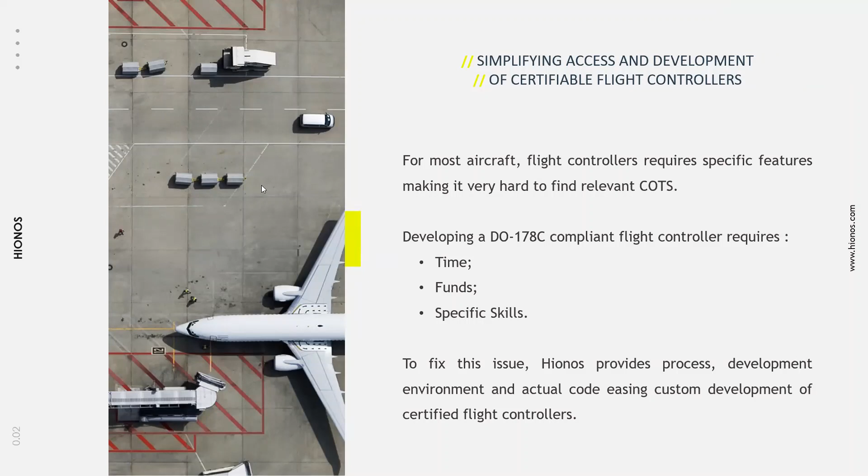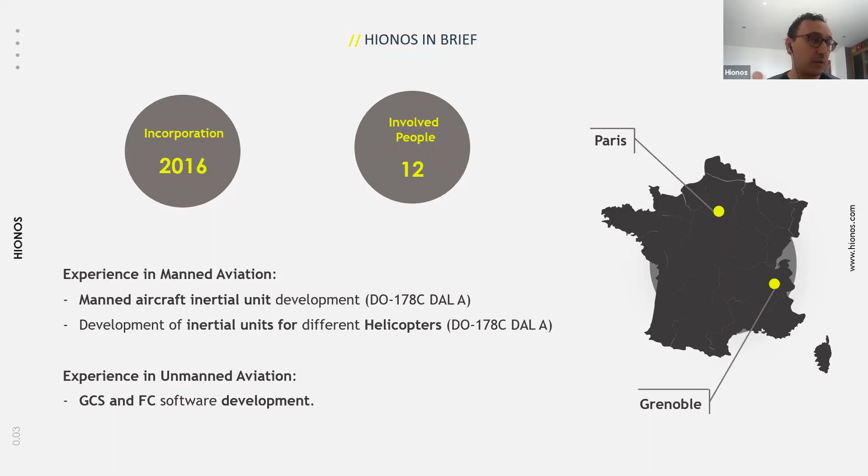So Hionos was created in 2016, and today there are 12 people involved in the company in Paris and in Grenoble. The Hionos team has mainly an embedded software background and a lot of experience in the development of certified software solutions in avionics. Big experience in the development of inertial units for avionics and for helicopters, in compliance with DO-178C up to DAL A, and also experience in the development of software for unmanned aviation, especially ground control software and flight control software.

Hionos scope starts when the need for DO-178C for the whole or a part of the software is clearly identified.

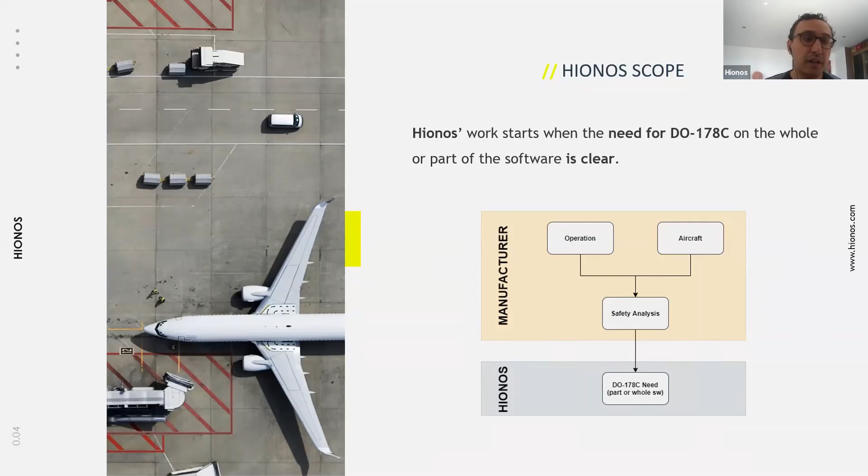So, as I said, Hionos scope starts when the manufacturer's scope of the need of DO-178C is well identified, and it will be identified when some activities are realized, like safety analysis, and this need will also be dependent on the type of operation and the aircraft characteristics. The role of Hionos is to work closely with the manufacturer to apply those needs in the software part by implementing the appropriate software compliant to DO-178C for the appropriate level of criticality.

In the context of its scope, Hionos provides 3 different products. We provide a process which is compliant to DO-178C called Supvareno with the appropriate certification plans. We provide also Pulsar Factory, which is a development environment which includes all the appropriate tools to develop DO-178C compliant software, also in compliance with Supvareno, and we provide also off-the-shelf autopilot software for drones. And in Pulsar Factory, we can reuse a set of components from Pulsar to obtain a new tailor-made autopilot.

And we will talk in more detail on those solutions in the next presentation. But before, I turn the floor over to Antonio to present Abionica and European regulation, and then I will finish with the presentation of the development lifecycle for certified UAS.

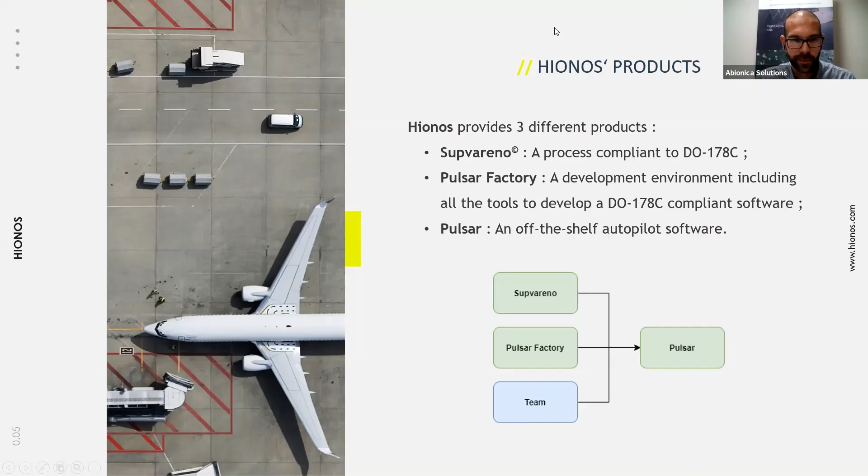I'll introduce myself. I'm Antonio Belmar. I'm founder of Abionica Solutions and Prime Core Systems, and I've been in this industry for almost 15 years. Actually, we started in this industry when there was no application for unmanned aircraft. So we had the aircraft, but we didn't have any application to put it to. And we've been there for a long time working mainly in flight control systems, both the hardware and the software part, and at architectural level. And after all that time, in 2018, I founded Abionica Solutions.

And having all that background, you can see here, developing autopilot guidance systems, guided ammunition, the first certified civil UAVs in Spain and Europe, and also working in smaller and bigger aircraft. The company started working in the development of Targus OPV. It's an optionally piloted vehicle, a twin-engine, 1.2 tons aircraft. And our know-how covers autopilot control laws development and integration, aerospace-grade flight control system design, development and integration, and consultancy and training services.

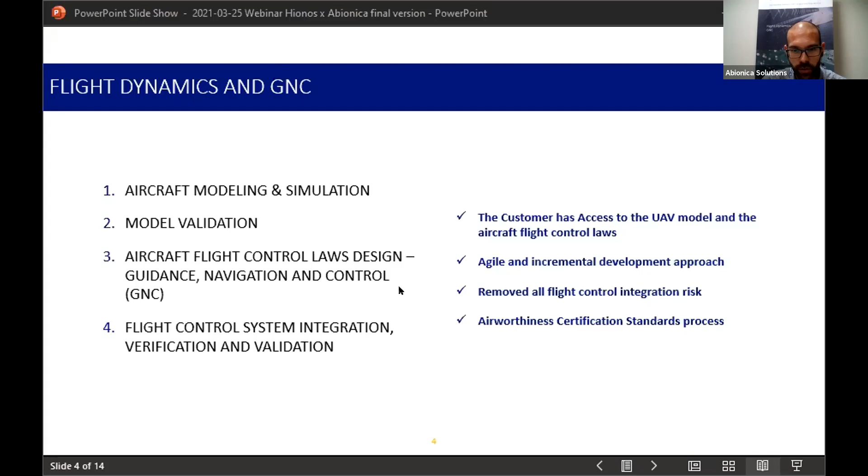I'll tell you a little more about that. So from the flight dynamics and GNC, we cover all the value chain from aircraft modeling and simulation to flight control integration and verification during flight testing, and obviously implementation of not just control laws but also guidance and navigation.

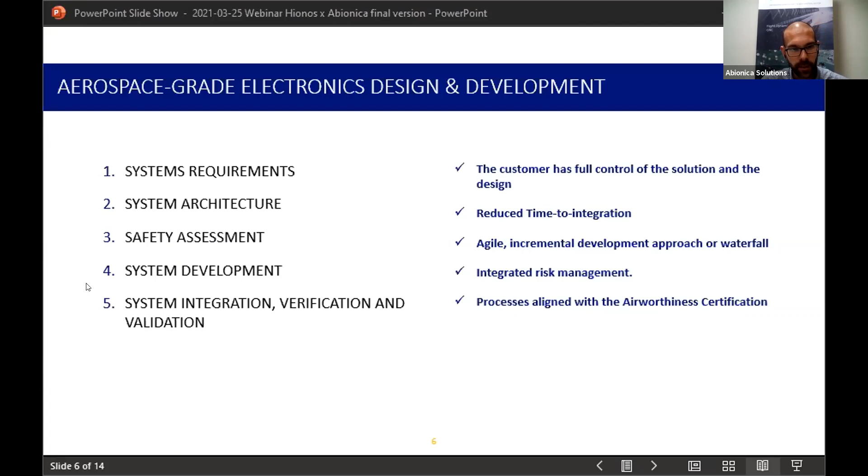From the aerospace-grade electronics design and development, we also cover the whole product life cycle, from system requirements to architecture assessment. We skip this part. Most of the times we outsource, or the customer outsources the development of the hardware, but we specify for them the hardware and software requirements. But we cover also the supplier management, and we also cover with them the integration, verification, validation activities.

And the consultancy and training services: the most common services we provide are related to conceptual studies, so conceptual phases like trade-off studies, feasibility studies, and other support. Advisory services regarding the market, so how the market for certain products is there, because as we said, we gather a lot of information and experience from the US market in general.

And the training, because most of the manufacturers, and we'll talk about that during the presentation of the UAS certification, most of the manufacturers lack certain processes implemented in their organizations, so we help them embrace those processes. We customize those processes for them, so we help them grow as their product grows, right?

So some initial inputs related to the UAS certification. So what's the certification, first of all? Well, it's a process where it is demonstrated that the aircraft type meets safety requirements. The design organization selects or builds a set of certification specifications, I'd say those are the basis, and agrees with authorities.

It's kind of a negotiation process where the manufacturer says, okay, these are my specifications, and I want to design something based on that. And the authorities say, okay, if you develop something and you demonstrate to me that this is what you have in the end, I will allow you to fly. It's not as simple as that, but more or less that's the short story of it, right?

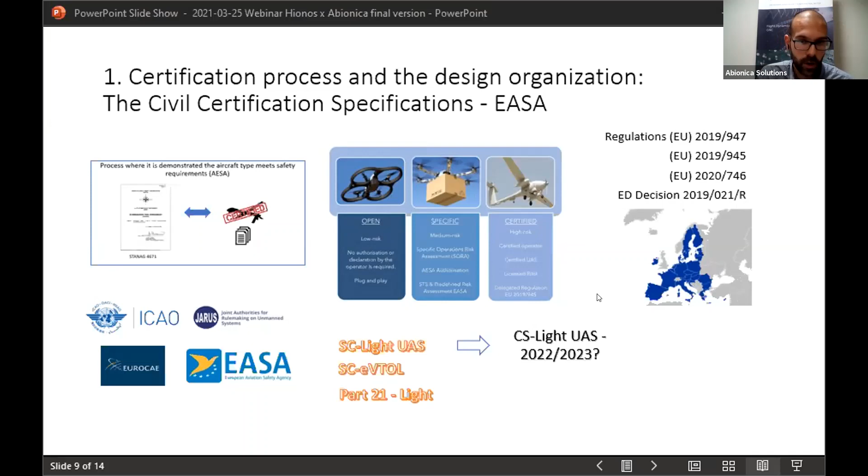These new regulations are already in place in the European Union and some additional countries following EASA directives, which provides a wide and expanding market for those who want to work on a certified product using those directives. So we are not just talking about one country's regulations, we are talking about the whole continent. And as far as I know, other countries are also trying to embrace the same approach.

So what about the certification process? For most of the manufacturers that want to jump into this new industry, it's a dual project. They have to start not just the certification of the aircraft, but also certification of the organization. And this is really important because sometimes in our initial estimates we lack this other part, the organization, and normally we fall short of it.

Normally in any development project we gather requirements from our customer, right? But in this industry, we should also take a look at authorities and what the regulations are telling us. Because if we don't have a good starting point from both sides, we will not be able to succeed in the process of developing the organization and the product at the same time.

Some organizations design and develop brilliant aircraft systems, and once it is developed, they go to the certification authorities expecting some kind of test campaign to get certification. Unfortunately, the aerospace sector does not work like that. It may require the identification of a set of safety requirements agreed with authorities from the very beginning of the project.

Some of them get to the end and say, hey guys, let me just start flying my aircraft. And they say, no, do you have a certification plan? What are your certification bases? And sometimes this lack of information will force them to make major changes in the aircraft design, which are very expensive along the whole project.

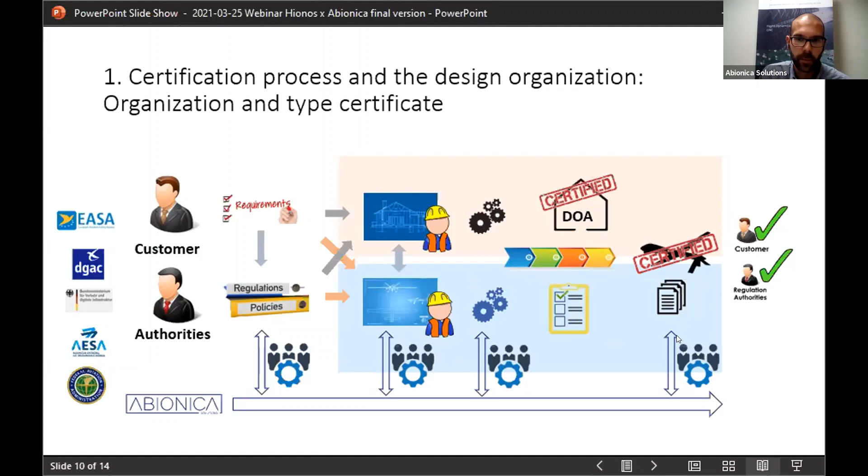So what about the technical side? One of the key aspects we cover with our customers is systems specification and design, because UAS are generally very complex systems with plenty of units, items and components that must work together to provide functionalities that until now were only covered in big commercial aircraft, such as fly-by-wire concepts or TCAS, a traffic collision avoidance system, now commonly known as detect and avoid or sense and avoid. Those systems were traditionally used in commercial aviation, and now they're applied to this new industry.

Most of these systems are not available in the market. If they are, they lack the required qualification, because most OEM manufacturers just provide something that functionally complies, but not from the safety point of view. That makes the design process even more difficult and eventually more expensive.

At the same time, all these developments must have happened under a boring and bureaucratic set of guidelines that the organization shall be compliant with, which is the ARP 4754, which is a really good set of guidelines in order to accomplish all the processes and procedures you may need to go for, and will be aligned with the DOA, the Design Organization Approval process.

So you can see here some of the procedures that could be implemented in the system. I'm not going to get into detail on all of them, but just for you to see that there is a really complicated quality system they have to implement in the organization.

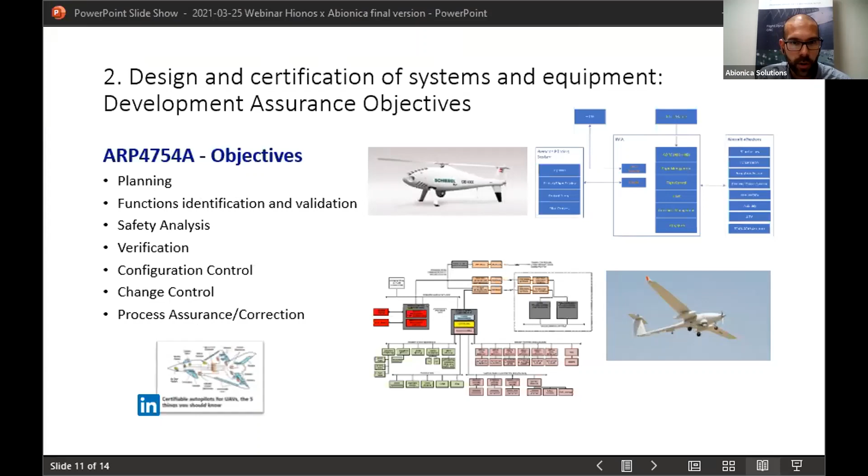So that is why in this industry, safety and quality are key. We talk about authorities that they have to take into consideration from the very beginning of the project. We talk about the type certificate basis. We talk about how complex the system is. And the problem is that it may sound ridiculous, but safety and quality will save you time and money in the whole project.

And yeah, as we said, it may sound ridiculous because you could say, okay, I want to do something, I develop a prototype, I will not take care of quality, I will not take care of safety, I want to develop something as fast as possible. But the problem is that if you don't consider those parts from the very beginning, and you don't implement that at least iteratively or incrementally in your project, it will be difficult for you to accomplish the final product that you want to have.

I mean, you don't want to fly, you want to sell something, you want to sell a product. So that's why sometimes it's difficult to end up with the desired product if you're not considering those two key parts, right? So you can see here how quality or design assurance, systems and equipment, and safety requirements must roll together in your projects to provide not just a certifiable product, but a reliable and viable solution to the aerospace market.

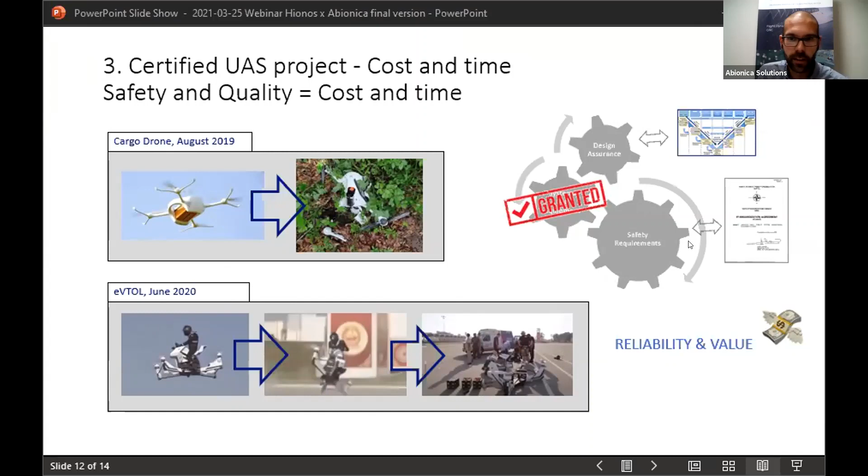But I can assure you that there are plenty of projects that even though they have the resources and brilliant ideas to implement, they realize too late the way forward. That is why we have developed a set of procedures, guidelines, and in summary, development approaches that avoid wasting time and money, not just from the organization point of view, but also from the systems architecture strategy point of view.

I'll tell you some tips regarding the project development cycle. Never forget that when you're developing a product, you're also developing an organization. Take into account these two main stakeholders, authorities and your customers. Consider quality as the cost of not having quality, because it's very expensive not to have quality in such projects. And try to implement that in a gradual way, because starting with a really heavy quality system from the very beginning could be dramatic. Cost of changes is very important. So develop your project in such a way that changing something when the project is pretty advanced is not so expensive.

So in other words, leave the software changes to the end. That will be a really good strategy to implement in your project. Try to use model-based design as much as possible, because it's a good example.

You are building, and this is now really hype, the digital twin. You're trying to do something in an environment where nothing will be broken, there are no consequences, and it's really cheap. So you will identify requirements that you probably haven't identified from the very beginning. It's really valuable, and shortens your development process a lot.

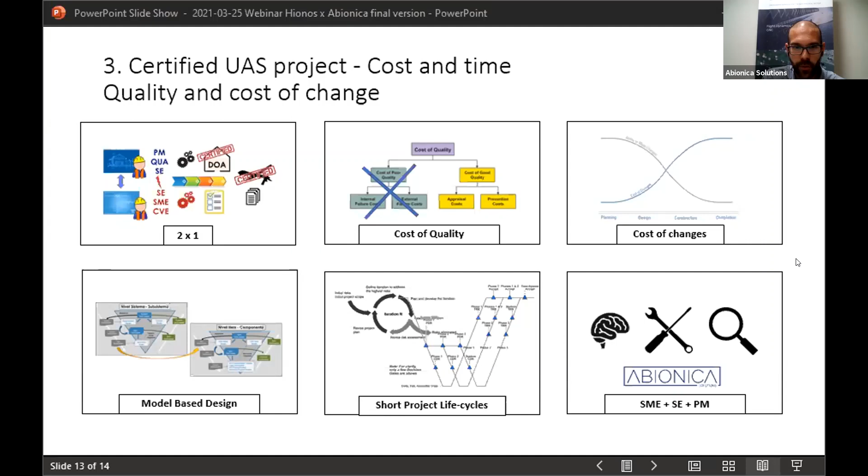Short project life cycles. Try to do iterative, incremental, or agile. Even though those may sound against quality or against safety, they could be implemented in such a way that they will be compliant with the safety standards. And at ABIONICA, in the end, what we do is tailor all these processes and procedures in order to help organizations develop that approach in a smart way, in order to avoid any risk that may happen.

And finally, I wanted to share with you the specific category and how certified UAS could be applied there. As you may know, the certification process for certified categories, so big aircraft or eVTOL, is really expensive. You need a big team, a lot of time, plenty of discussions with EASA, and you have to develop your organization and your product at the same time. It's really expensive and time consuming.

But there's a sweet spot, let's call it. With these new regulations, we have a new category called the specific category, where certification of the aircraft is expected not to be so heavy or so expensive. For those who don't know the specific category, the way to identify that your aircraft is under the specific category is through the CONOPS and the SORA assessment.

With the CONOPS of your aircraft or your intended operation, you go through a process called the SORA, the Specific Operations Risk Assessment, where you analyze the risks and you get a SAIL level. This SAIL level goes from 1 to 6, and if you go beyond 6, your aircraft will right away get into the certified category. There's nothing you can do there. You have to certify the way we certify manned aircraft.

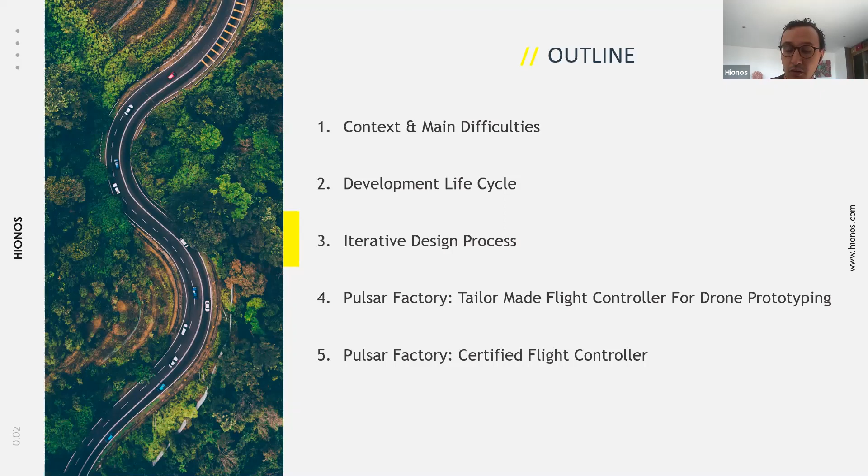So now I will present in more detail our proposition of a life cycle to design and produce a certifiable UAS. The outline: I will explain first the main difficulties, why we want to propose this solution, then a macro presentation of the development life cycle, then the iterative design process philosophy, and then I'll present Pulsar Factory, which is Hionos's solution for drone prototyping first, and then to produce a certified flight controller. And in this part, we will focus only on the certification of the flight controller subsystem.

So today, the main difficulties that manufacturers are facing are related to the possibility to be in compliance with the new regulation rapidly and with a reasonable cost, and to be able to improve the time to market. However, today we know that the traditional development processes are slow and expensive. So there is a gap between the need to go rapidly to certification and the actual processes of certification that exist today, which are slow and expensive.

And there are also some problems which are directly related to flight controller development due to drone diversity, because we need some specific components, some specific autopilot for each drone. And it's really difficult to find generic code that we can deploy on different drone frames.

And there is also a difficulty in the organization of the manufacturer teams, software manufacturer teams, flight controller manufacturer teams, because when we need to target certification, we need very specific skills. And generally, we can't find those complete skills in those organizations. We need skills on requirement design, on model-based design, on software, on mastering the certification standard. And from the experience that we have in discussion with manufacturers, we generally have difficulty finding all those skills at the same time in the manufacturer teams.

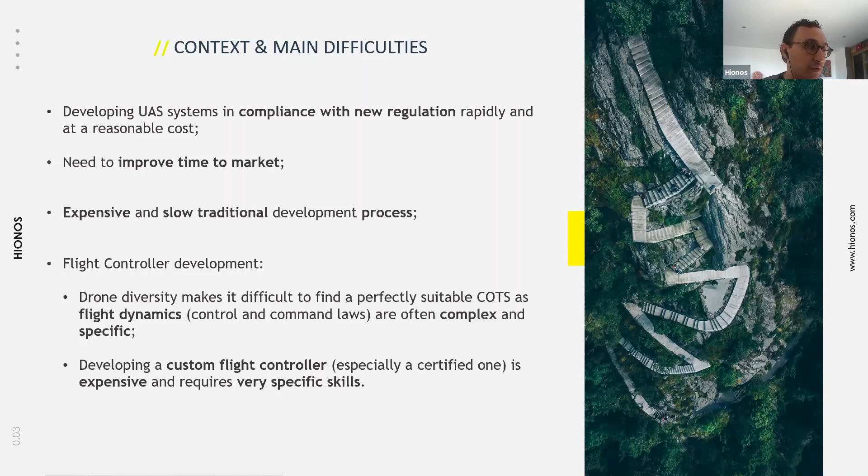And second, to go also rapidly, once the prototype is validated, from the prototype to the certification with a reasonable cost. And also to allow the manufacturer to improve the prototype by applying an iterative and incremental design. So those are the main advantages of this development life cycle: design a prototype that we can test in flight, offering the possibility to enhance the prototype by applying an iterative and incremental process, and then going rapidly to the certification once the prototype is validated.

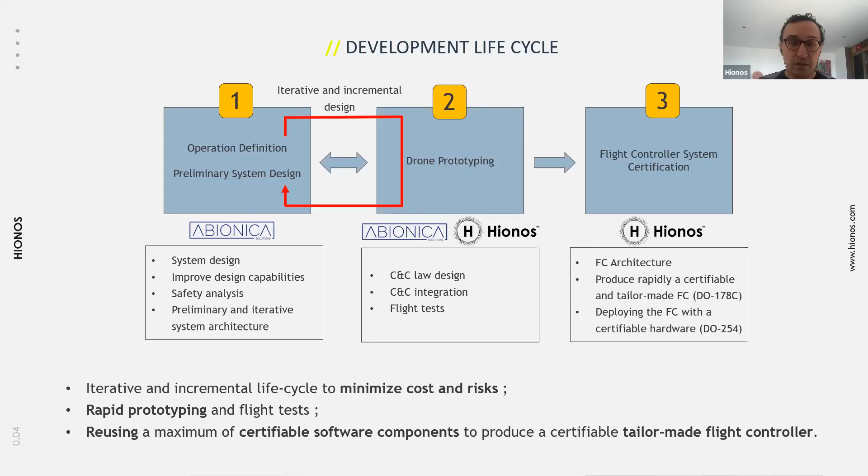So for the first step, I will let Antonio maybe explain some elements, and then I will proceed by explaining steps 2 and 3. Thanks, Amin.

Yeah. Well, the whole thing about this process is the risk, obviously, cost of changes, implementation of quality and design assurance along the whole process. So the idea is that, okay, if we develop, let's say, using a typical waterfall approach for our product, it will take a lot of time, obviously, and I can tell you for sure it will be almost impossible that from the very beginning you're going to have all the requirements.

That from the very beginning you're going to end up with the right system architecture, the right items and the qualification level and the type certificate basis. So the way to go forward, and we've done this several times already, is doing that in an incremental iterative way. We are suggesting this agile approach that helps us first go as soon as possible to the flight test and run the process. So it's not just one V model.

You're probably familiar with the V model, but it's like doing that in an iterative way, digging deeper after each one of the iterations. The idea is that, first of all, you are identifying those risks from the very beginning and you tackle them first. You simplify the design and development process, and you have a functional test bed from the very beginning. That's a really good thing, because you may have requirements on your mind, you may have written or modeled them, you have even used model-based design and tested them, but until you do certain flight tests, you cannot validate them properly.

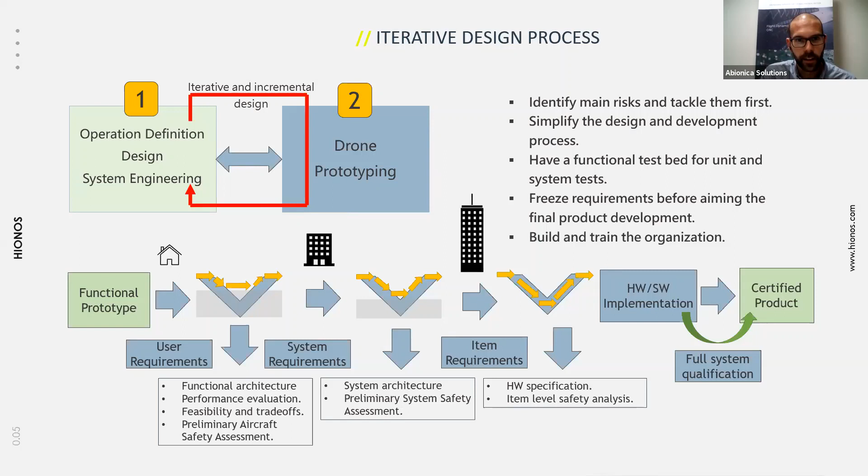Thank you, Antonio. So then you're going to proceed to see the prototyping in the certified phase, but we will focus at this level on the flight controller part and how we can implement with the lean methodology a tailor-made flight controller for drones. So Pulsar Factory, the main advantage of this solution is that it helps to mix both COTS and custom software advantages.

That means that Pulsar Factory will be an environment which embeds a set of COTS components implemented and proposed by Hionos. And this environment gives the opportunity to the customer to implement its own component. They could be a software component or model component that the manufacturer could simulate with their teams.

And then the Pulsar Factory gives the opportunity to integrate those new components with the actual existing components to provide a new tailor-made autopilot flight controller. That means that the manufacturer could reuse up to 80% of Pulsar COTS.

And the component-based architecture of Pulsar could really help us to interface easily the software component provided by the manufacturer and the existing software components provided and already implemented by Hionos. Each component, in fact, has its own inputs, outputs, and responsibility. And as long as they are respected, the manufacturer can adapt the behavior of the component and integrate easily its component.

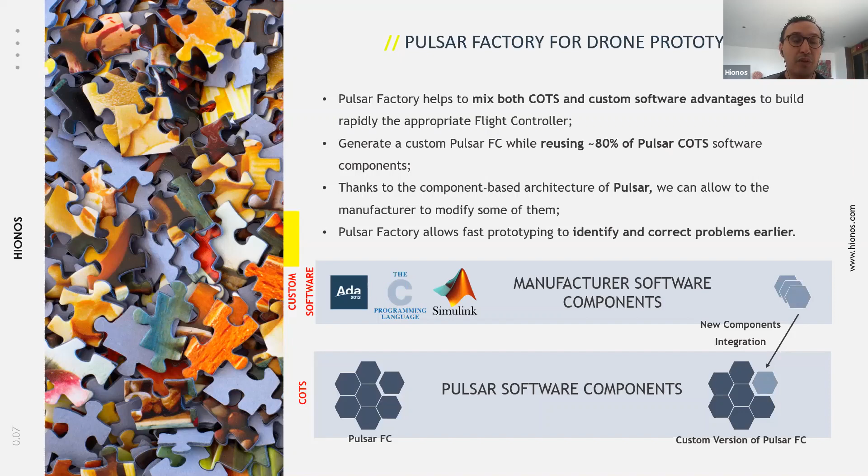And using this platform, we can identify problems early and correct them really early in the process. This is the philosophy of Pulsar Factory. Produce your own specific component, and Pulsar Factory is the framework to integrate them and to build the appropriate software that we can test with a real flight test.

So this is what I said. So the main three advantages of Pulsar Factory for drone prototyping, what we need to keep in mind. Pulsar Factory for prototyping gives you the opportunity to implement your own component, which could be flight control laws design or some improvement of some component.

You can rapidly integrate them to go to flight test while reusing a set of existing software components. You can deploy this software on existing hardware, which is low-cost or breakable hardware. We don't need at this step to use certifiable hardware.

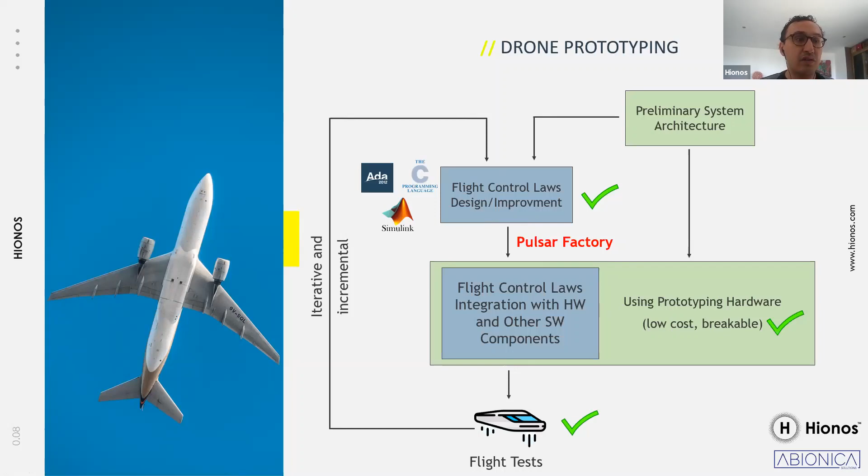So those three advantages help the manufacturer to reduce the cost by reusing the maximum of Pulsar software components, to reduce the time because he will focus only on his specific software component. The possibility to embed this software on existing breakable and low-cost hardware allows the manufacturer to reduce the cost, to control the time, and also to go rapidly to flight test.

And the fact that we can go from the development of a specific component to flight test rapidly, and when I'm talking about a rapid process, it's a question of days if everything is well configured. We will see after that what are the steps in the installation of Pulsar Factory.

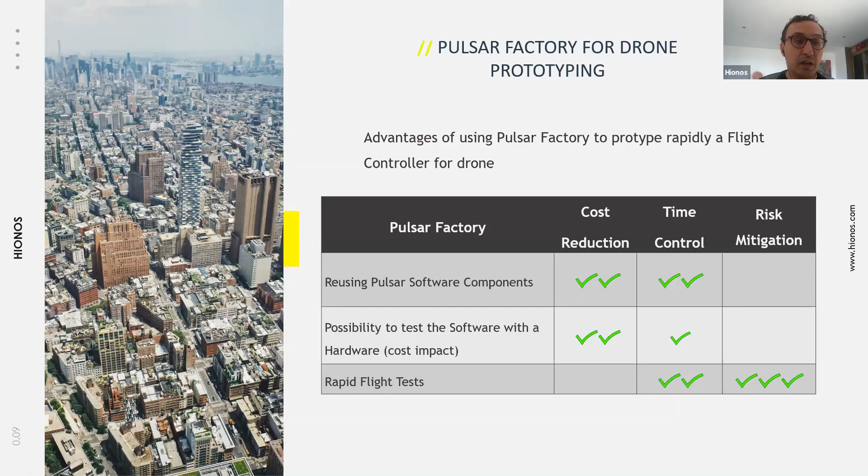So the fact that we can go rapidly to flight test could be good to control time, because we are going to find the problems earlier, and we have the opportunity also to enhance the specific components, and also we can mitigate the risks by identifying the problems earlier in the process.

At the beginning, we will start with a step to configure Pulsar Factory. We will exchange with the manufacturer to adapt Pulsar Factory to the specific drone. We will discuss what specific components the manufacturer would like to implement, what the interfaces of those components are, for example which sensors the manufacturer would like to use, what the communication protocols are. So we will discuss several topics. We will get the maximum of information.

Hionos, after that, based on this information, will install Pulsar Factory for the manufacturer teams. That means we will install the appropriate tools, the set of software components that the manufacturer wants to reuse, the tools that allow the manufacturer to integrate his own components, the appropriate tool chain to build and to embed the software on the appropriate hardware. In fact, we are going to install the environment to let the manufacturer be autonomous from the implementation of its own component to the flight test.

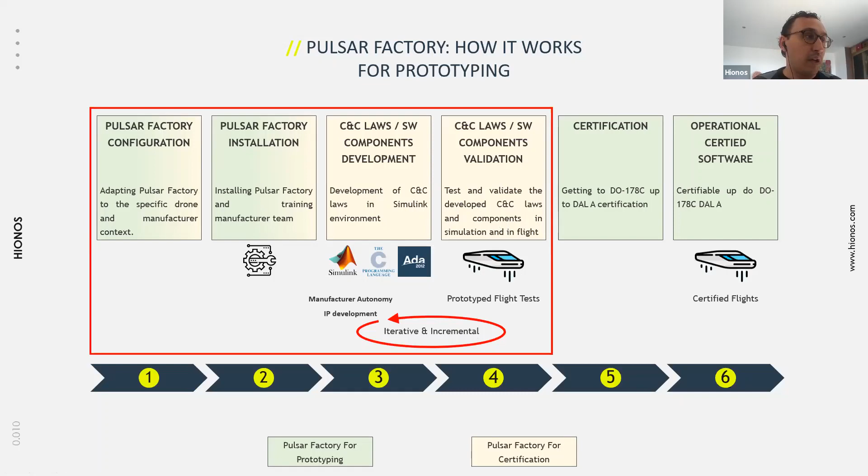This is how it really works, and this is a true use case in which one of our customers, one of our partners, used Pulsar Factory. For example, the first steps, in which we define together the flight controller interfaces and all the necessary data inputs that we need to configure and install Pulsar Factory, took about 1 week. 7 weeks to install Pulsar Factory, to support and train the manufacturer team to use Pulsar Factory and to produce the first specific component.

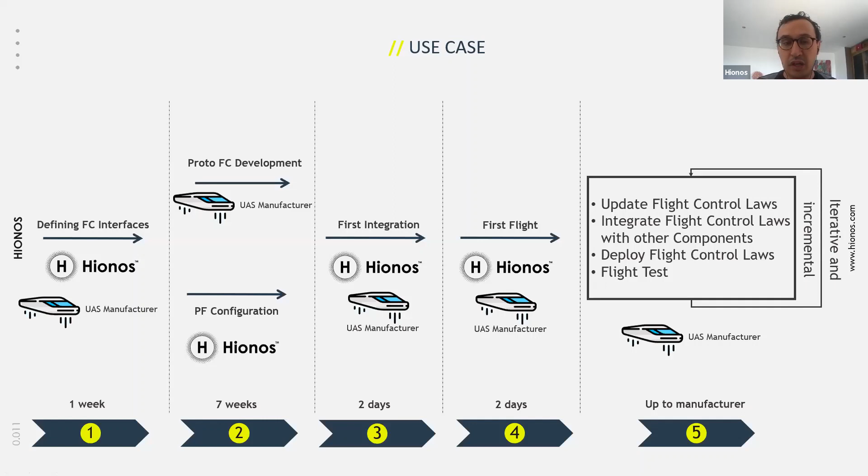In this use case, the targeted specific component was only the flight control laws, and they were implemented with Simulink. So this phase took about 7 weeks, and the integration took 2 days. For the flight test, it also took 2 days. Once those steps are finished, the manufacturer is autonomous to go back to enhance the flight controller prototype and then go to integration and flight. This is a true use case in which we can see that going rapidly to flight test is a question of weeks if we use a maximum of software components and focus only on our specific components.

Then we will go to Pulsar Factory: how are you going to use Pulsar Factory to develop the certified version of the flight controller in compliance with DO-178C? Pulsar Factory will be different in the certification phase. That means that we will integrate all the activities required to get the certification. Pulsar Factory embeds a process called Supvareno that we also developed, which is a DO-178C compliant software development process already used in the development of Pulsar software and Pulsar components.

That means that the components the manufacturer reused in the prototyping phase are already certified. In the certification phase, we will provide all the certification artifacts of those components. The cost and time to get the certification will be reduced because the reused components were already done respecting this process. Supvareno is a process that we defined and described in certification plans. The certification plans were approved by authorities, and Pulsar Factory will be the environment in which we have all the appropriate tools to implement all the activities of the Supvareno process.

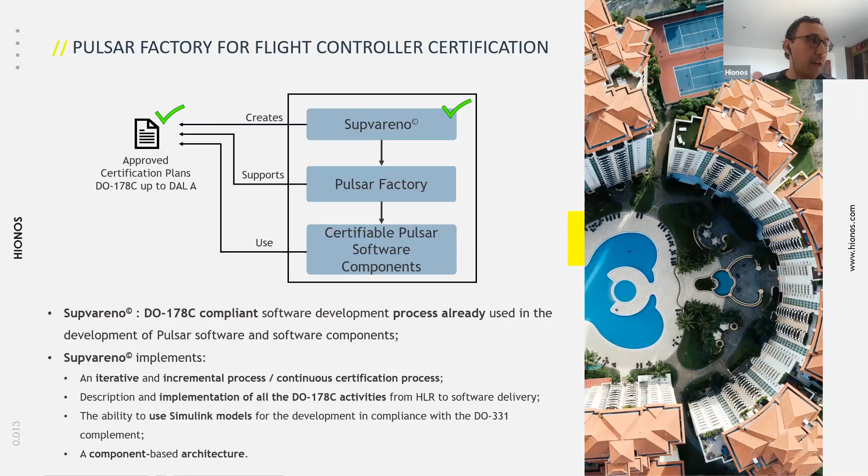So as I said, Pulsar Factory for the certification phase will be the development environment, which includes all the tools to develop the 178C compliant software, which is not the case for the prototyping phase. In the prototyping phase, we need just the environment, the tools to integrate the component and to go to the flight test. That's all. But when we switch to certification, at this moment we need to integrate all the tools to be able to develop all the certification data.

And the Pulsar software and Pulsar software components reused in the prototyping phase, and which will be also reused in the certification phase, are already implemented respecting this process. So the certification artifacts and data are already developed and present, and we can deliver them to the manufacturer of a drone when he will present the certification data to the certification authorities.

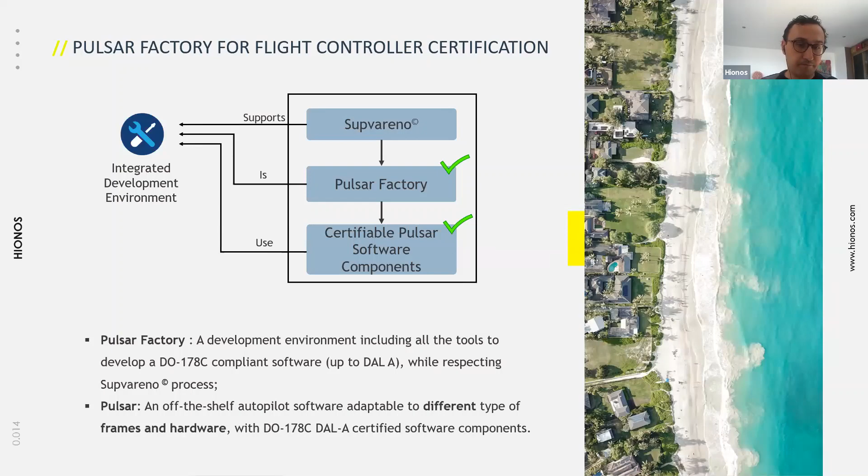So the main activities to put into practice in Pulsar Factory for certification are mainly two activities. The manufacturer team, with the support of HIONOS, need to produce the certification artifacts of only the new specific components that were implemented in the prototype phase, respecting the Supvareno process. So there is no need to re-implement the certification data for the reused components, only producing the certification data for the new components.

So for this activity, HIONOS could support the manufacturer to put into practice Supvareno, to understand the process, to configure the process, not adapting the process, but to help the team to be autonomous on the application of the process. And then we can deploy the software with all the artifacts in the flight controller architecture based on certified hardware.

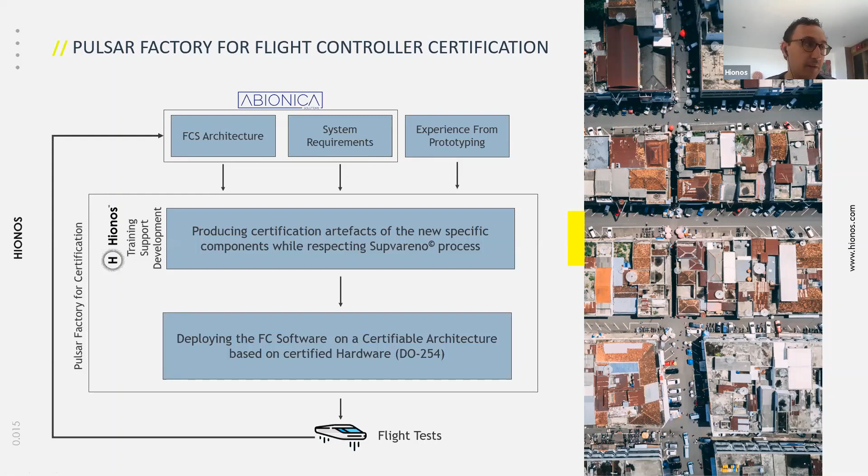So to summarize the advantages of using Pulsar Factory to produce a tailor-made or certified flight controller, the main advantage is to reduce cost, because we are going to reuse a maximum of already certified components, and because we are also using a well-defined and already defined process. The manufacturer isn't going to define a new process compliant with the 178C. The process is ready, and a great part of the software components is also ready. So we need just to develop the certification artifacts for the new components.

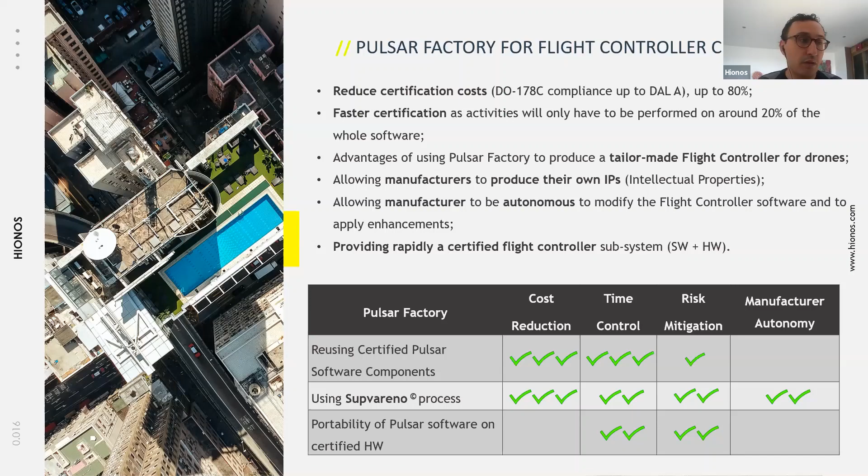This also has a direct impact on time control, on risk mitigation, and, an important thing, on the manufacturer autonomy. With Pulsar Factory we give the manufacturer the opportunity to produce their own components IP. And with the training on the process, they could be autonomous to modify the flight controller in the future and to apply new enhancements. So they would use the process autonomously to enhance the flight controller software.

So here, if we go back to the workflow, to the Pulsar Factory workflow, once the prototyping phase is validated, we will go back to discuss with the manufacturer on how we are going to configure the Pulsar Factory, but this time for certification. We will discuss maybe the new system architecture. We will discuss system requirements, the flight controller system architecture, and if there are new needs on sensor redundancy or new sensors that we are going to integrate.

So we will discuss the new configuration of Pulsar Factory to adapt to the new needs for certification. And then we will install Pulsar Factory again, but at this level, we will install all the appropriate tools to be in compliance with the Supvareno process, and we will provide some training to the manufacturer team if the manufacturer would like to be autonomous on its development and on the enhancement of its software.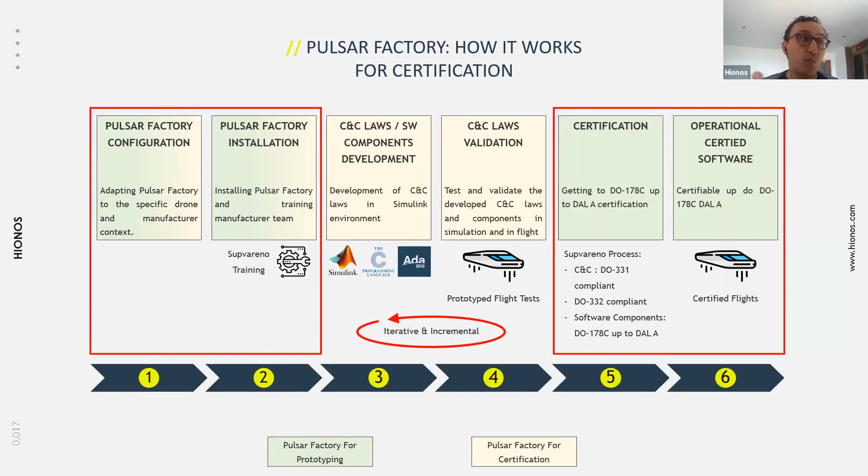Once the installation is done, we can go to the certification phase, in which we are going to produce concretely the certification artifacts for the new components, while respecting DO-178C up to DAL A, which means that we can support DAL B, DAL C. We also support the DO-331 compliant, which is specific to model-based design, and then DO-332 also, which is a set of guidelines to address some vulnerabilities when using object-oriented technology. And then you are going to get an operational certified software if all those activities are done.

So in conclusion, the main points that we need to keep in mind, for me, are 3 points. Importance of rapid prototyping with flight test. This is an important point if you want to produce a certified UAS. It is very important to put in place a strategy to go rapidly with a prototype to flight test. This is very important to mitigate and to overcome early in the process the difficulties and the risks.

Then the second message is that developing a certifiable flight controller, a tailor-made one, without being an expert in certification, and particularly in the DO-178C standard, and at a reasonable cost, is possible. Yes, it's possible. We proved that with Pulsar Factory. Using Pulsar Factory, we may not be experts in DO-178C, but we can produce tailor-made and certified software in compliance with DO-178C up to DAL A.

And finally, if we have this opportunity to produce an easy and fast certification of the flight controller, this is a potential, and this gives new opportunities to manufacturers to address new markets. Those are the 3 main messages in conclusion of this presentation.

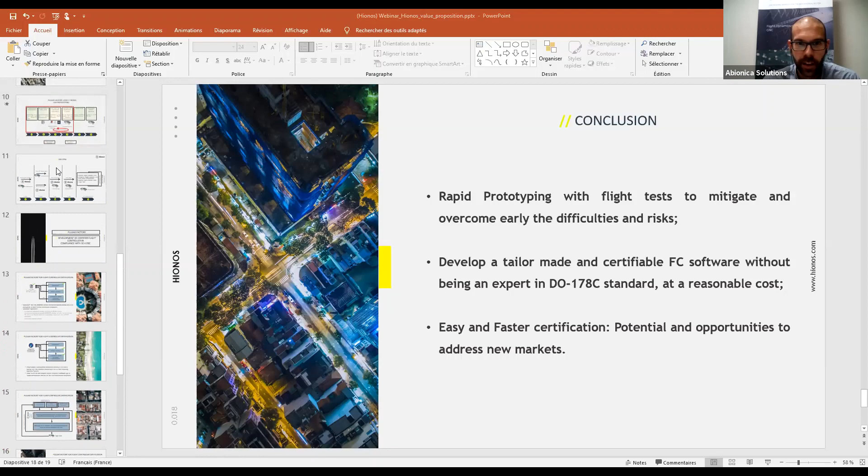So I don't know if I respected the time. I think not. So if you have questions. We are never on time. Don't worry. Yes, it's okay. So if there's any question, I think they can share through the chat, or they can just speak up. Yes, if you want, in the chat or. Nobody's typing anything. I think nobody understood what we're saying. We have to improve our English, I think. If someone wants to ask a question directly without the chat, it's also possible.

Okay, I'll tell you something else about that. So, just to start with the first question. So we are talking about iteratively being able to implement something. Well, we got a question already. I don't see the chat. Okay, yes, they can share the video. Okay. Thank you for the confirmation.

So the idea would be that the manufacturer can start flying as soon as possible. They can build a prototype, and they can implement the, let's call it, software solution using Pulsar Factory, on top of libraries, modules, blocks that are already pre-qualified. That will simplify the whole process for them. At the same time and in parallel, we're decoupling here the functionalities of the aircraft from the safety requirements, which is key. Because at the very beginning, what you gather from your customer are the requirements. You don't have any safety requirements.